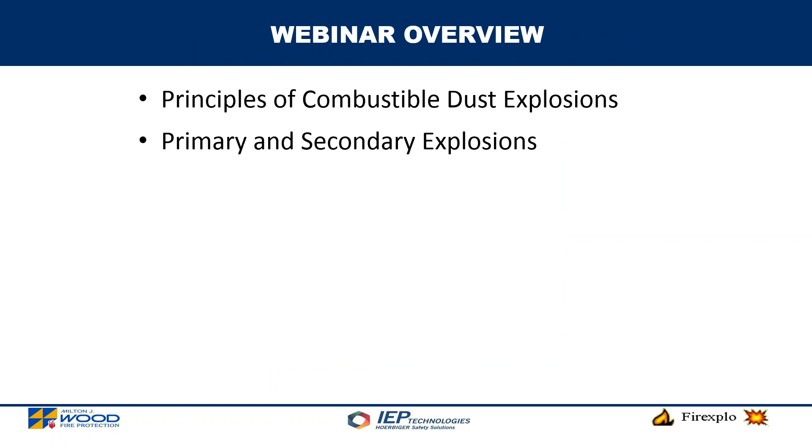So let's talk a little bit about what we're going to learn on today's webinar as we work through the process. The webinar overview is, we'll start with principles of combustible dust explosions. We're also going to talk about primary and secondary explosions. We'll talk then about hazard assessment and ignition risks. We're going to talk about fire protection requirements, fire protection examples and best practices, explosion protection strategies, and finally about process vessels at risk.

The experts are looking forward to covering all of these topics, and we'll start this afternoon's presentation with Dr. Bob Zalosh. Dr. Bob Zalosh is from Firexplo, and he'll be talking, as you can see here on the screen, dust explosion hazard analysis for biomass facilities. A great place to start today's discussion. Again, you can submit questions using that question portal, and we look forward to the presentations today. Dr. Zalosh, the webinar is now yours.

Okay, thank you, Tim, and hello everybody online. The discussion I'm going to provide of dust explosion hazard analysis for biomass facilities is intended to lead to the determination of appropriate explosion prevention and explosion protection measures.

Okay, we're going to begin with the elements of a dust explosion as illustrated in this slide. We start with some combustible powder or dust sitting on a surface inside or outside process equipment. We then subject that combustible powder or dust to a disturbance or airflow so as to lift the dust and form a dust cloud. If the concentration of the dust cloud is greater than the minimum explosible concentration measured for that particular dust, and if the dust cloud encounters an ignition source, the result is flame propagation through the dust cloud, what's formally called a deflagration. If now the deflagration occurs in a confined area, that confinement is all that's needed to produce the dust explosion that we want to prevent or protect.

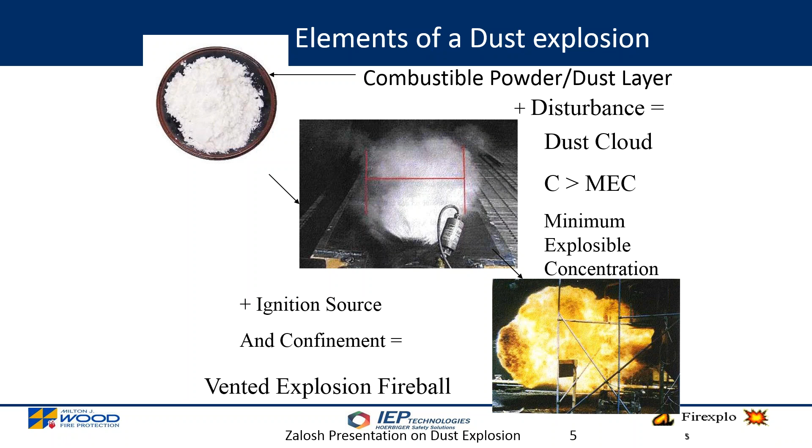Why and when does a burning dust cloud result in an explosion? The answers are: when the dust particles burn rapidly enough and are sufficiently concentrated for the flame to propagate through the suspended dust cloud, and when the cloud is burning in an enclosure that restrains the expansion of the hot gases produced by the burning dust particles. It is this restraint of the normal expansion that generates the pressures that we associate with a dust explosion.

Some examples of biomass facility process equipment where a dust cloud may be present during normal operations are particle size reduction equipment such as a hammer mill, conveying equipment such as a screw or belt conveyor, a pneumatic air transfer duct, and a bucket elevator.

Storage bins and silos have dust clouds during the loading of that equipment. Media dust collectors have dust clouds during the pulsing, and those dust clouds can result in the dust collector explosion you see here. Cyclones, pellet coolers, and rotary dryers.

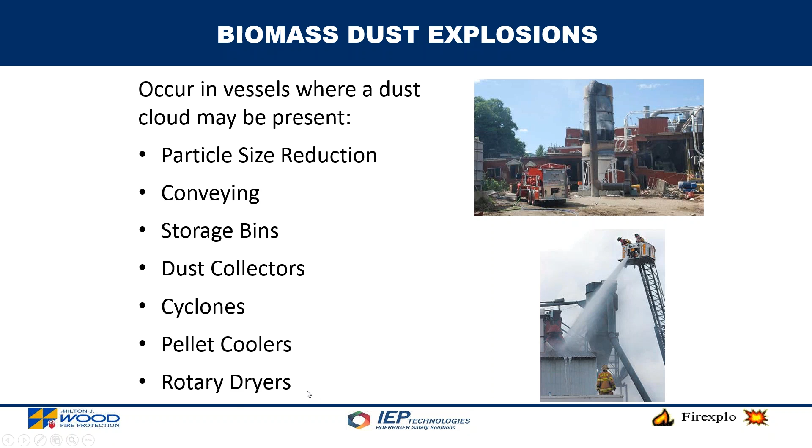I'm now going to start discussing frequent ignition sources in this equipment. In the case of mills and conveyors, a common ignition source is tramp metal brought in with the biomass feedstock in the form of screws, bolts, nails, wire, and other metal inadvertently included with the biomass delivery to the plant. It's possible in many cases to remove that metal by installing a magnet on or over the conveyor or by providing an electromagnetic pulley that will divert the ferrous metal from the normal process flow stream.

We're looking at, in this slide, the result of tramp metal being impacted by swinging and rotating hammers in a mill while the biomass is being milled. The impact and frictional heating of the biomass material produced the ignition and char layer that you see on the hammers. The result in this case was a dust explosion in the mill that caused serious burn injuries to the mill operator.

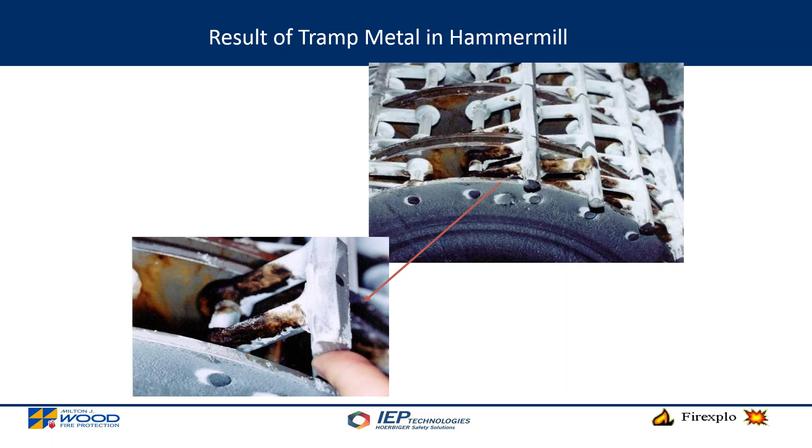The photograph on the left of this slide shows the result of a dust explosion in a bucket elevator and conveyor at the top of some silos at a grain elevator terminal. The explosion propagated to other areas of the plant and equipment in the plant.

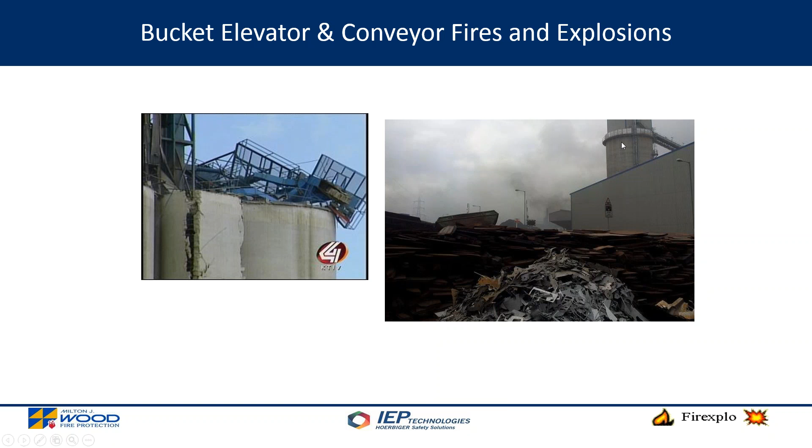In the case of biomass dryers, two common ignition sources are overheated particulate accumulations in the dryer and recycling of fines that have already been dried. So the additional heating can raise the temperature of the fines or the accumulated particles up to the ignition temperature.

The photographs on the left show the fire damage to a large rotary drum dryer due to recycling. Fire was initiated by the recycling of fines.

In the photograph on the right, we're looking at the discharge end of a large rotary drum dryer at a wood pellet plant. The explosion occurred in the dryer. It blew off the other end, the front end of the dryer, and the blast waves from the dryer explosion blew off the walls in a large portion of the plant.

In the case of storage bins and silos, an important ignition source is self-heating of certain biomass material. This self-heating can be initiated by microbiological processes or the condensation of moisture in the silo. Those initial processes raise the temperature of the biomass enough for chemical oxidation to take over, and if allowed to continue for a long enough period of time under warm ambient conditions, can eventually lead to spontaneous ignition and smoldering of the biomass in the silo or bin.

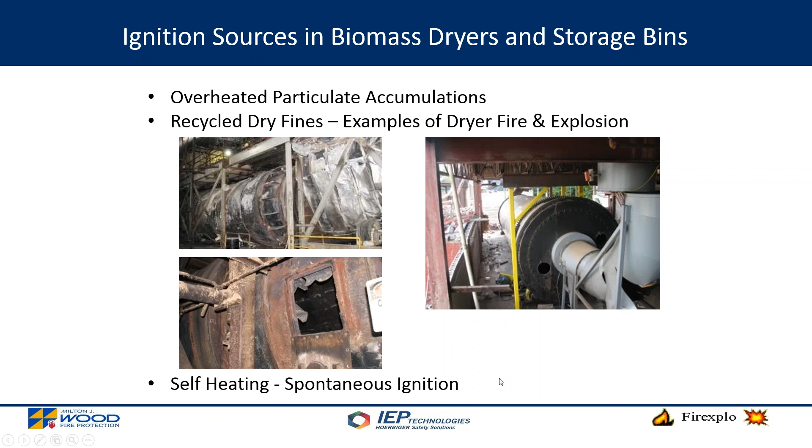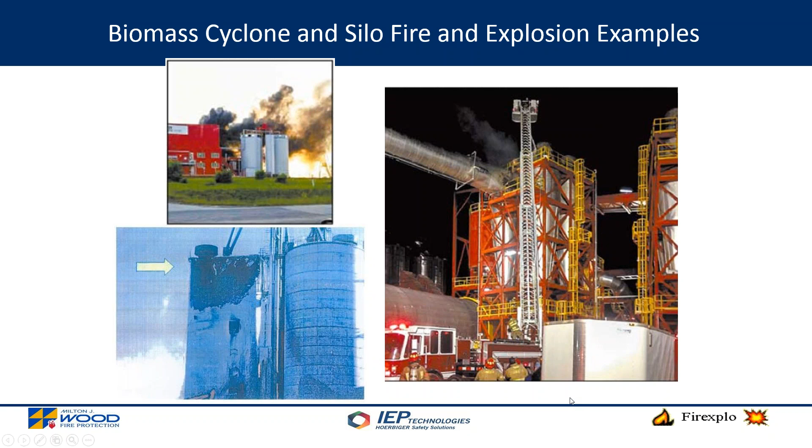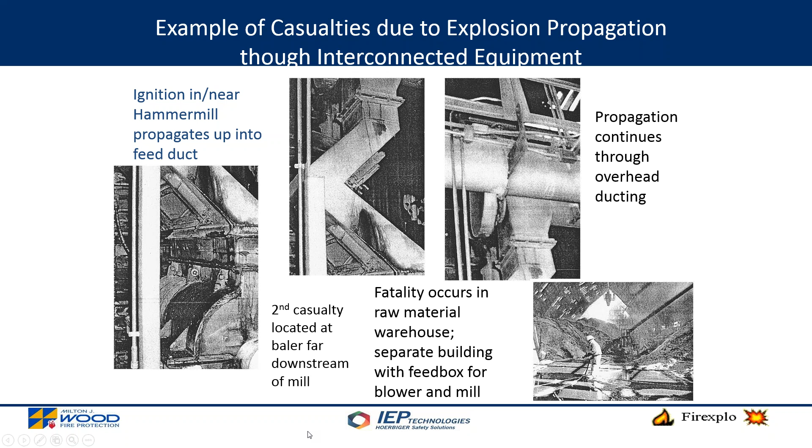In this slide, we're looking at photographs of buildings at a wood pellet plant that experienced an explosion and fire. In the foreground is a large receiving area at the plant. In the back of that building was some classifying and screening equipment and also a dust collector that had explosion vents, but the explosion vent released and vented towards a group of wood silos only a few feet from the wall of the building. The other buildings in the plant housed the dryer, the pelletizers, and the pellet cooler, among other things.

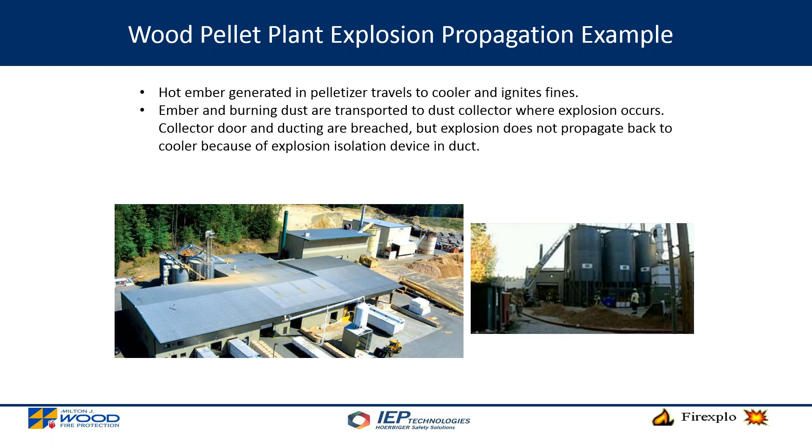The vented flame from the dust collector explosion impinged on the silo outside the collector. The silo fire that resulted required 14 hours of firefighting for extinguishment. Fortunately, there were no injuries in this incident.

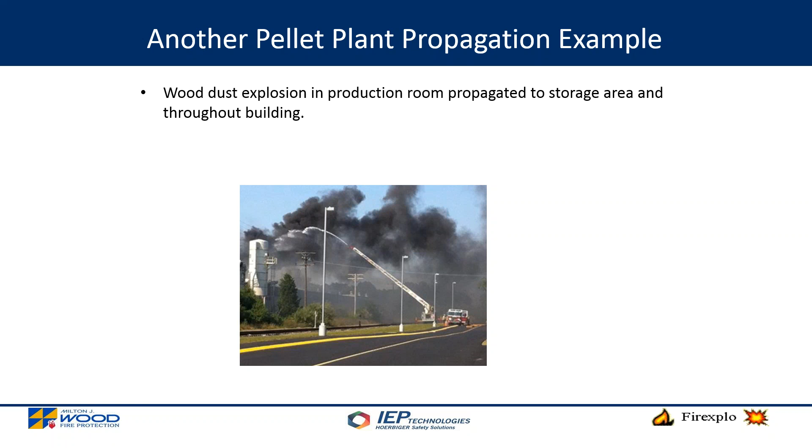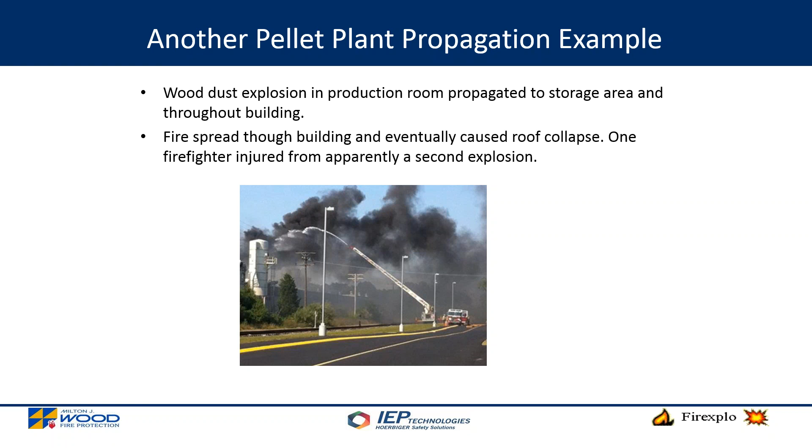When explosions like this occur, OSHA is going to be at the plant shortly thereafter.

In the first incident, OSHA inspected the plant and eventually cited it for serious violations of specific OSHA regulations, and also for violating the Section 5(a)(1) General Duty Clause, which requires a workplace free from recognized hazards. NFPA standards were offered as examples of recognized hazards and examples of abatement measures. In this case, the plant successfully hired an independent consultant to review proposed abatement measures and satisfy the settlement agreement for the incident.

In the second incident, OSHA found that the retention bin at that plant lacked spark detection, explosion suppression, fire and explosion isolation, and explosion venting devices. A conveyor system carrying combustible wood products lacked spark detection and fire suppression devices. OSHA cited the plant for 11 serious violations of workplace safety standards and required corresponding abatement measures. In this case, the plant was eventually shut down.

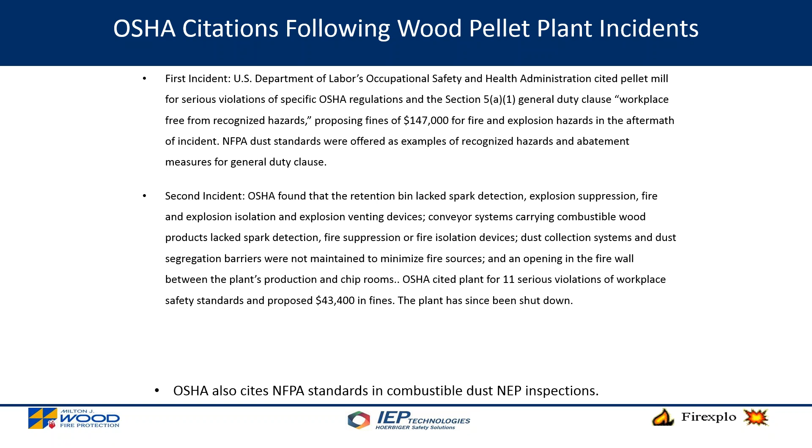Also, OSHA can conduct inspections without any incident if a plant employee communicates to OSHA that he or she is concerned about unabated fire and explosion hazards due to combustible dust at the plant. And each OSHA area office is also obligated under the Combustible Dust National Emphasis Program to conduct a few random inspections, even though there is no employee complaint or incident.

In the case of agricultural biomass, it would be the NFPA 61 standard on prevention of fires and dust explosions at agricultural processing facilities. These standards also refer to other NFPA standards, such as NFPA 654, which has valuable information on spark and ember detection and extinguishing systems and explosion isolation systems, as well as explosion protection for individual process equipment. Those standards also refer to NFPA 69, which provides the detailed requirements for explosion suppression systems and for explosion isolation systems.

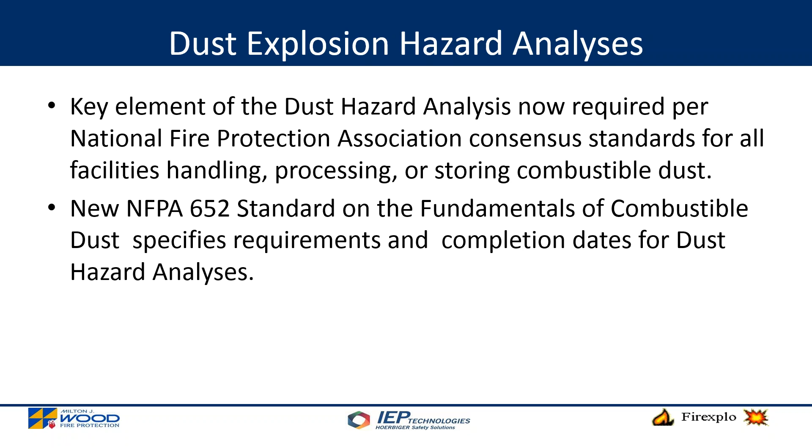The NFPA standards require a dust hazard analysis for all facilities handling, processing, or storing combustible dust. The NFPA 652 standard in particular has specific requirements and scheduled completion dates for the dust hazard analysis. The 652 standard requires that the dust hazard analysis evaluate the fire, deflagration, and explosion hazards and provide recommendations for managing those hazards. Where such a hazard exists, the identification and evaluation is required for specific fire and deflagration scenarios.

In other words, there's a need to identify where and how the dust clouds are formed or the dust layer is ignited, what the ignition sources would be, and what the results of an unmitigated fire or explosion would be. The dust hazard analysis shall also address potential deflagration propagation between parts of the process system and potential deflagration propagation between buildings or building compartments.

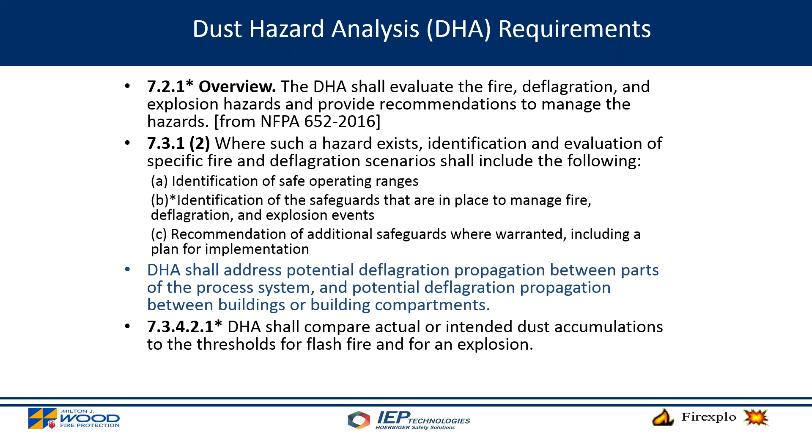The DHA shall compare actual or intended dust accumulations to the thresholds for flash fire and for explosions, which are described in the individual standards for wood processing, agricultural facilities, and other combustible dust commodities, and other similar standards.

There's a dust hazard analysis schedule required by 652 for new facilities and for significant modifications of existing facilities. The analysis has to be completed as part of the new facility development project. For existing facilities not undergoing significant modification, the dust hazard analysis has to be completed by September 15th, 2018, 3 years from the effective date of the standard, September 15th, 2015. So plant owners and operators have about 5.5 months to initiate the first dust hazard analysis and about 2.5 years to complete the dust hazard analysis for all the combustible dust areas in existing plants.

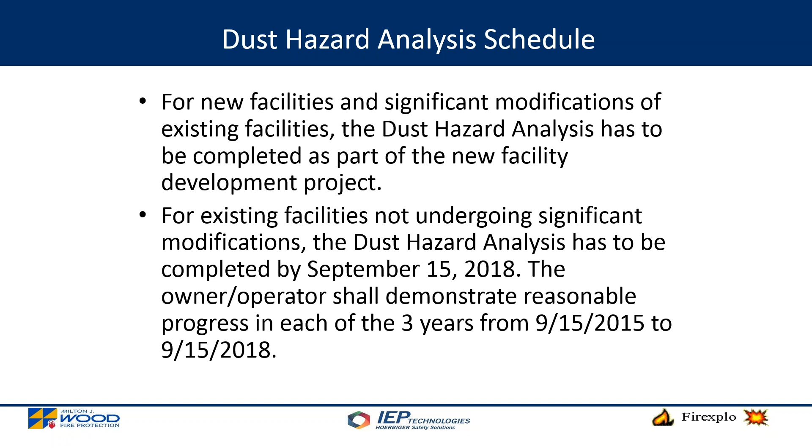That completes my portion of the presentation, so I'm going to throw it back to Tim.

Dr. Zalosh, thank you very much. Great foundation for the remainder of the webinar.

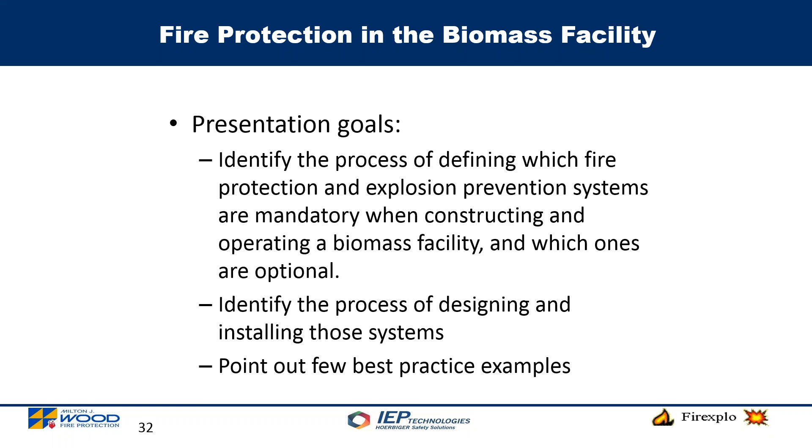Thanks, Tim, and good afternoon, all. I really appreciate the opportunity to present this brief outline of the process behind designing, constructing, and operating the key fire protection and explosion prevention features in a biomass facility. The presentation goals this afternoon are to identify the process of defining which fire protection and explosion prevention systems are mandatory and which are optional when constructing a facility, to identify the process of designing and installing those systems, and to give a few best practice examples.

So, how do we design and operate a biomass facility? First, the starting point are the building and fire codes. They tell us what we must do. They're basically the law of the land, so they're clearly mandatory, and they're almost exclusively occupancy-based, based on the buildings or occupancies that house the equipment.

The next building block are the adopted standards. They tell us how to do it. Those standards that are referenced in the building and fire codes are mandatory. Some, like insurance standards that might go above and beyond the mandatory standards, could be optional, depending on the relationship you have with your insurer. A few of the standards remain occupancy-based, but there's a clear shift into targeting a specific process or system with these adopted standards.

And so we arrive at the next key building block, which is our process hazard analysis. This is strictly a process and equipment-driven evaluation that has a mandatory implementation aspect and an optional implementation aspect. An example of the mandatory aspect is the PHA itself - it is mandatory for all facilities that handle hazardous materials like combustible dust. Furthermore, if we have an explosion hazard identified within the PHA, the protection option must be implemented. It's not optional.

And the last one is our government regulations - that would be OSHA, EPA, and similar, which lean more on the operational side rather than the upfront design and construction side of things. In the interest of time, the PHA and the government regulations are not going to be the subject of this presentation, so I'm going to make them disappear from the slides.

And on we go with our building and fire codes. So what are they? As mentioned before, they're adopted and written into the laws on a state-by-state level. The most widely used in the U.S. are the International Building Code, International Fire Code, and NFPA. There are some other fire and building codes implemented in other states, but these are the most dominantly used. They tell us what to do for any type of occupancy, and then specific to the occupancy type. They also tell us where to look for how to do whatever they ask us to do, through their reference to design and installation standards.

So what's defined in the building and fire codes? Many things on the construction side, on a fire protection and explosion prevention specific side. We have fire service features, emergency planning and preparedness, fire resistance rated construction, fire and smoke protection features, fire protection systems, control of ignition sources, means of egress, housekeeping and maintenance, and some others.

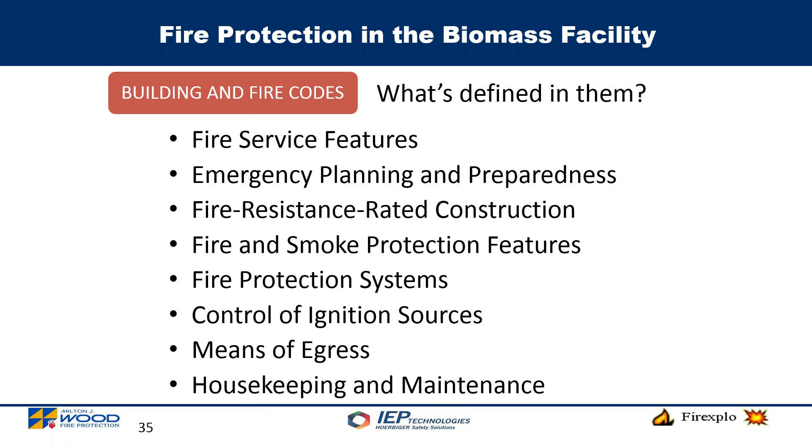An example that's very often overlooked in the initial design stages of the facility are the fire service features. All facilities, irrespective of their function, must be provided with full access into and around the facility by the responding fire brigade, and with an adequate water supply to fight fires expected in the facility.

As far as full access is concerned, typically a 20-foot wide road within 150 feet of any exterior wall in the facility. Water supply, volume, and duration are based on the larger of two things: one is the total surface area or square footage and construction type of your largest building in a facility, and two is the most demanding automatic fire protection system demand. Whichever one of these is larger, that's what you need to size your water supply to.

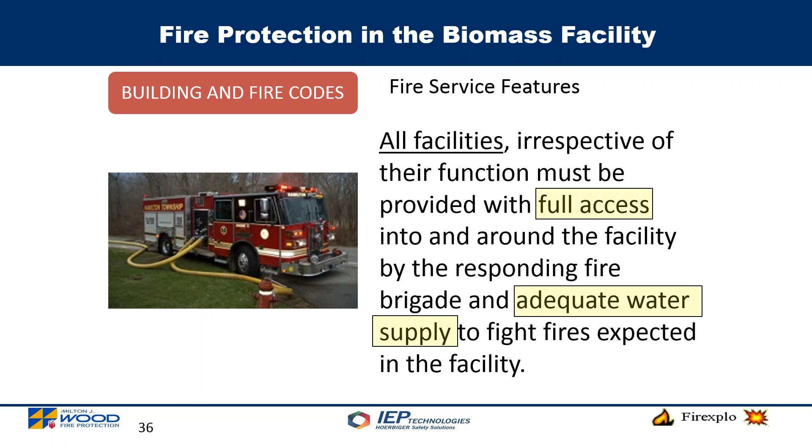Apart from those general requirements, the code defines the occupancy-specific features based on use and occupancy classifications. Typically the operating structures in a biomass facility will fall into one of the following classifications.

We have an F1, factory occupancy. We have an S1, or storage occupancy. We have an H2, a high hazard occupancy containing materials that pose a deflagration hazard, as is the case with our combustible dust. And we have an H3, high hazard occupancy, that contains materials that readily support combustion. That example is combustible fibers.

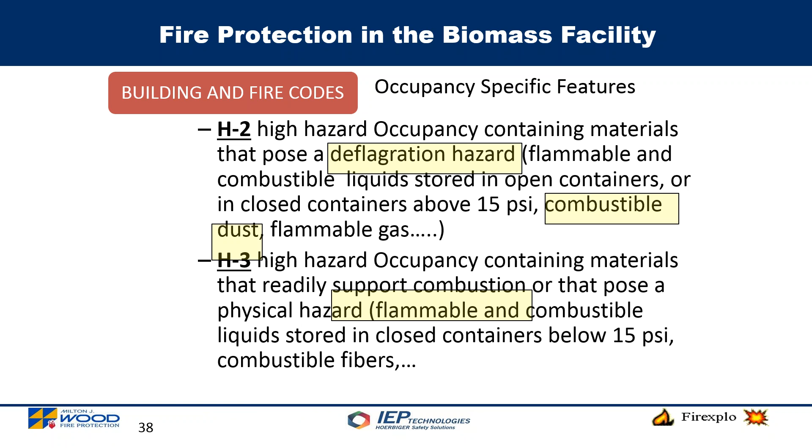Our slide here is messed up a little, excuse me for that. So the question asked is, does any flammable or combustible liquid, combustible dust, or combustible fiber inside an occupancy automatically qualify it as H2 or H3 occupancy? And the answer is clearly no.

Only when we exceed the minimums allowed by the building code in case of the flammable and combustible liquids and combustible fibers, and that's table 307. I'm just going to give you a snapshot of that table, if the presentation cooperates with me.

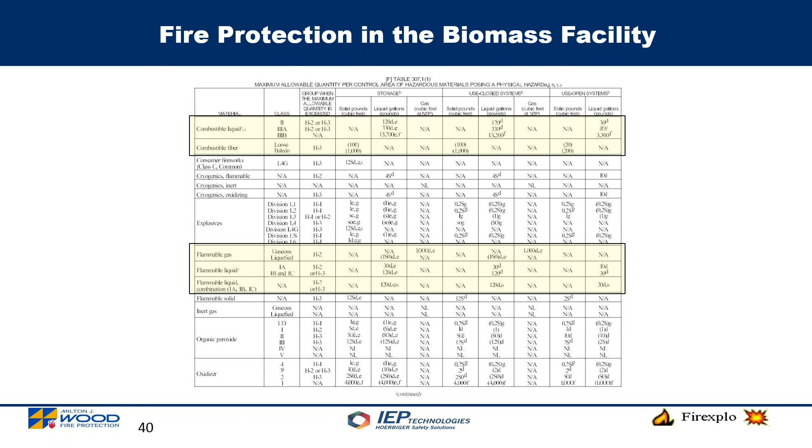This table basically gives you the maximum allowable quantities in a control area in your facility, either stored, used in a closed process system, or used in an open process system. If you exceed these quantities, you will no longer be able to qualify the facility or the occupancy as F1 or S1. You'll have to go to H3 in this case, or H2.

In case of the dust, combustible dust, if you exceed the quantities that are the minimums prescribed by NFPA standards - 654, 664, 652 that Dr. Zalosh just mentioned - then you would fall into an H2 occupancy category.

So, crucially important for the occupancies that are originally designed, permitted, and constructed as F1 and S1, as most of our biomass facilities are, they must be operated in a way that will not move them into H2 or H3 occupancy. And how do we do that? Very simply, it's housekeeping - we need to keep the hazardous materials below the minimums allowed.

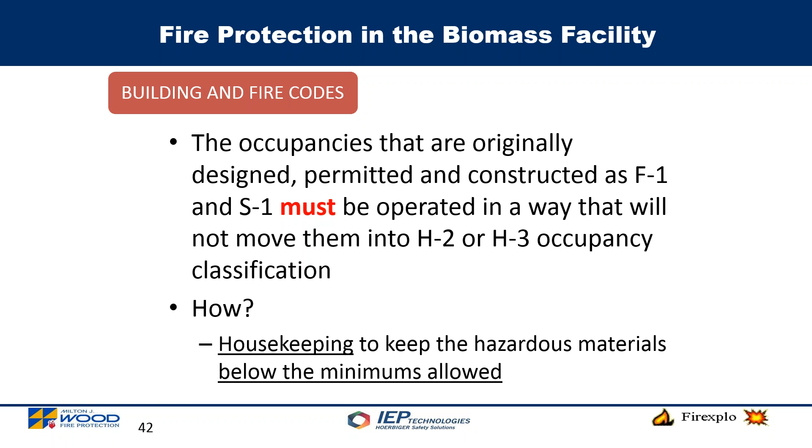Material control and housekeeping. So what all is determined based on the occupancy classification? Type of construction, construction methods and materials, maximum area and height of our buildings based on them being or not being protected with fire protection systems, structural requirements, EMP - electrical, mechanical, plumbing requirements - fire and smoke management, means of egress, and fire protection requirements. So fire protection requirements specific to this presentation are contained in Chapter 9 of the Building and Fire Codes.

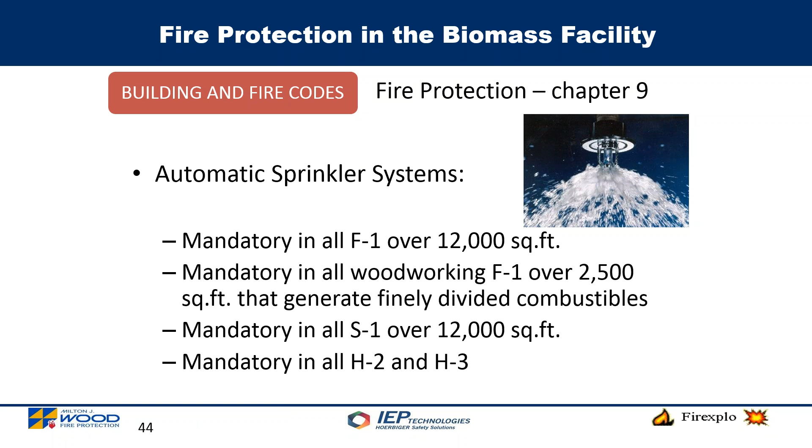Automatic sprinkler systems are one of the top ones in line for that. They are mandatory in all F1 occupancies over 12,000 square feet. Furthermore, they're mandatory in all woodworking F1 occupancies that generate finely divided combustibles over 2,500 square feet. They are mandatory in all storage S1 occupancies over 12,000 square feet. And they are mandatory in all H2 and H3 occupancies, irrespective of the square footage of the building.

The code allows for use of alternative automatic fire extinguishing systems. I know we have probably a lot of people here from the pellet industry and other biomass industries that are not particularly fond of water. There is an option in the codes for those buildings that they do not wish to protect with water to protect them with an alternative system.

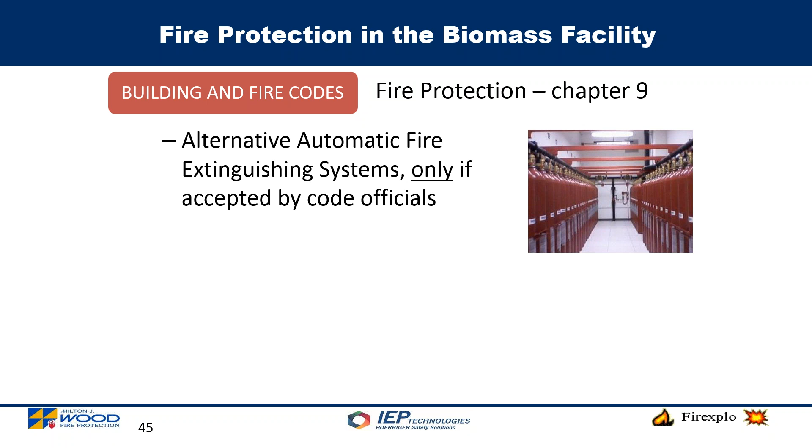The picture on the right hand of the presentation shows the gaseous suppression system. There are some other options with dry chemical systems and some other systems, but they are allowed by the building code only if accepted by the code officials as an alternate to the sprinkler systems mandated in Section 903. Fire Protection Chapter 9 further describes the requirements for fire detection alarm systems, typically based on the number of occupants in the building.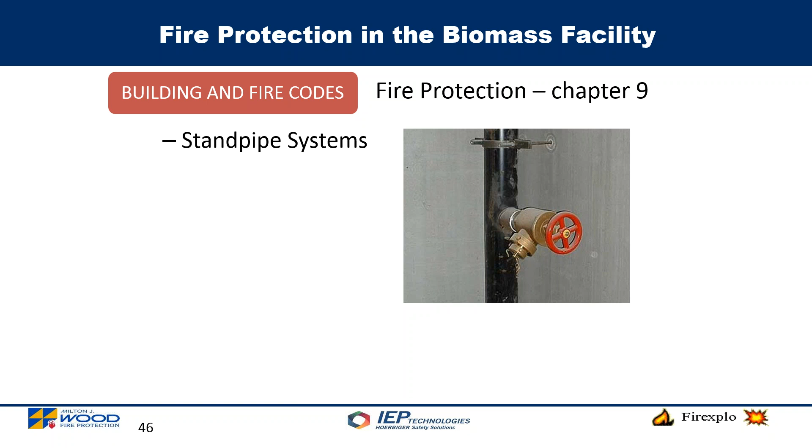Our standpipe systems are typically based on the height of the highest operating floor above the road, or the depth of the basement operating floor above or below the operating roadways used for fire department access. Typically anything over 30 feet in height requires a standpipe. Then we have fire extinguishers, pretty much common these days and located throughout the facilities.

We have our smoke control systems, smoke and heat vents. Again, very often disregarded in the initial design stages. Clearly required by the building code for any F1 and S1 occupancy that has more than 50,000 square feet in undivided area.

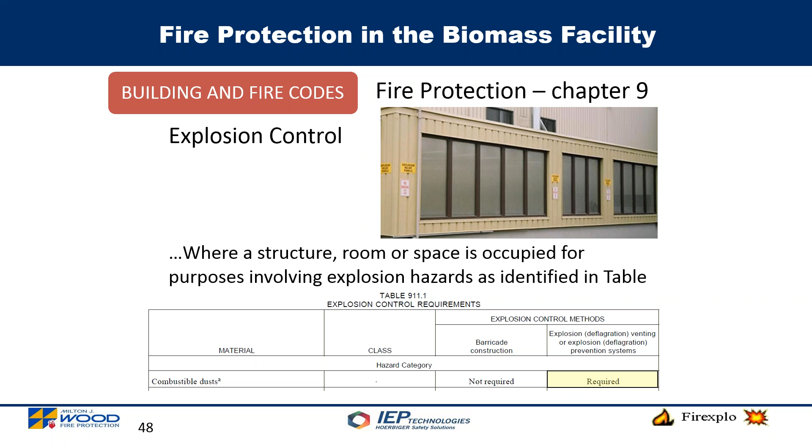Lastly for this slide, we have explosion control. Where we have a structure, room, or space occupied for purposes involving explosion hazards as identified in this table, you can look at the excerpts from the table in the bottom left corner. Combustible dust is one of them, and our explosion venting or explosion prevention systems are required. Again, this is occupancy-based building code. We are talking about explosion venting or explosion prevention systems for the rooms or spaces within the structure, not specifically equipment.

Building and fire codes further expand into the specific types of facilities. A couple of examples I'll give you here are from Fire Code Chapter 13, combustible dust producing operations. You can find the requirements for those in Chapter 13, and we also have Chapter 19 for lumber yards and woodworking facilities that clearly apply again for our biomass manufacturing facilities.

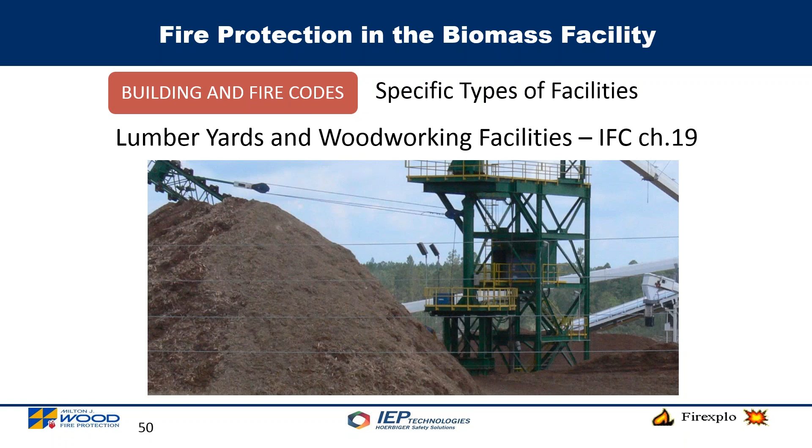As far as the adopted standards are concerned, they are one of three kinds. Those specifically called for in the building and fire codes would be referenced NFPA standards typically in the U.S. Those that are specifically adopted by the states across the board, an example of that would be the state of Florida. There's a list of NFPA standards that are adopted across the board and mandatory to be used, irrespective of the fact that they might not be specifically called for in a building code or a fire code.

Then we have the insurance underwriter standards, again often overlooked initially in the design stages of the facility, very costly to implement later. FM Global data sheets are most commonly used for HPR, or highly protected, facilities.

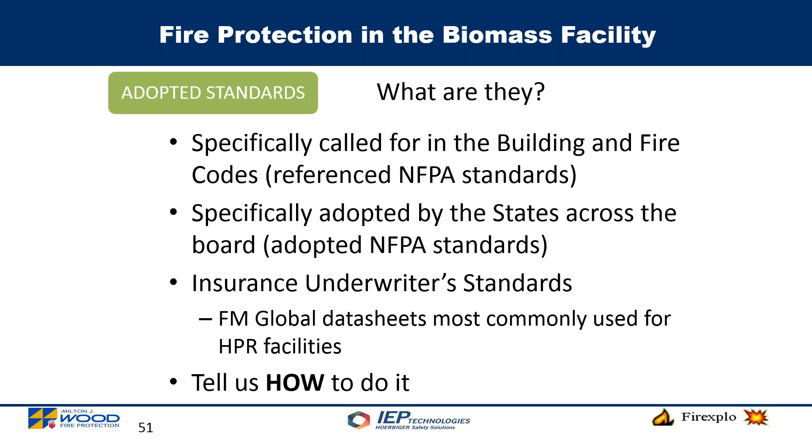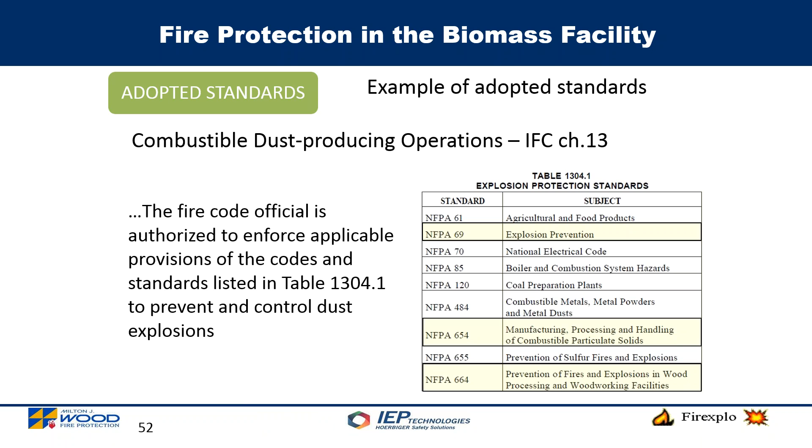Adopted standards tell us how to design, construct, and commission the systems required by building and fire codes. Examples of adopted standards would be in Chapter 13, which I mentioned before, for combustible dust producing operations. If you are one of those, Table 1304.1 will specifically call for you to comply with NFPA 69, explosion prevention; NFPA 654, manufacturing, processing, and handling of combustible particulate solids; and NFPA 664, prevention of fires and explosions in wood processing and woodworking facilities.

What's defined in adopted standards? They give us the details on how to design, install, commission, and maintain the systems required by the building and fire codes. The emphasis is on life safety, either through active systems or passive building and process features. Our insurance company standards, in addition to life safety, emphasize the protection of property and business interruption concerns. So by this definition, they would by nature be more strict and more demanding.

I'll give you a few examples of best practices from some of the biomass facilities. We have our dust collectors or air filters. The example on the right-hand side is for dust collectors located outside, and the one on the left is one located inside. Typically, you're going to see explosion vents on the outside air filter or dust collector.

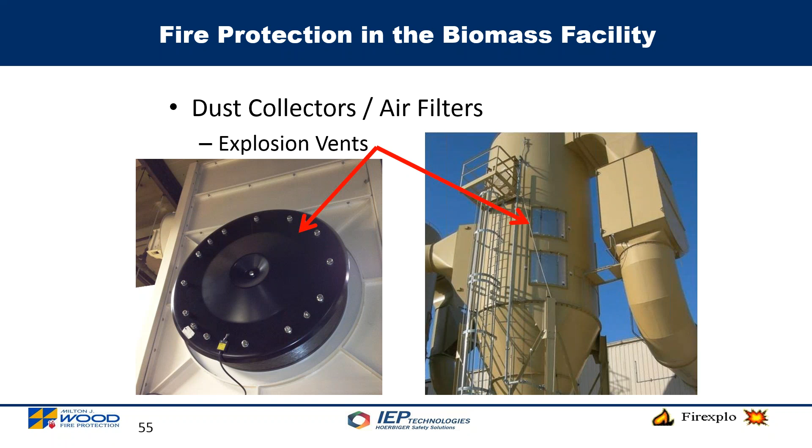This is actually an example of a badly placed explosion vent, because the explosion isolation device you see on the return duct is located directly in the path of the blast zone. A better example is on the left-hand side, our flameless vent example on the dust collectors located inside of the facility.

If explosion vents are not on your menu, either you have no ability to put them in, or you're prohibited from putting them in because of the nature of the product you're handling inside your dust collector, explosion suppression is definitely a viable option, widely used for those purposes.

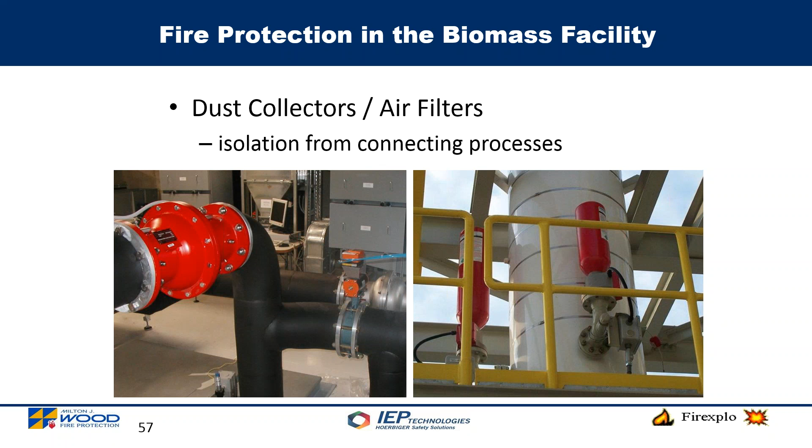We also have isolation from connecting processes. Dr. Zalosh's presentation showed some examples of what happens if you don't have these systems in place. The picture on the left-hand side shows the explosion isolation device or back pressure valve. On the right-hand side, we have chemical isolation, which is injecting suppressant, in this case, in the duct.

We also have spark detection and extinguishing systems. Those are typically put on the ducting that leads into the air material separators or dust collector. On the left-hand side, there's a spark or ember detector looking for the qualifying particle, the ignition source, before it gets into an enclosure that's obviously full with fuel. It then extinguishes it further downstream before we enter into the enclosure.

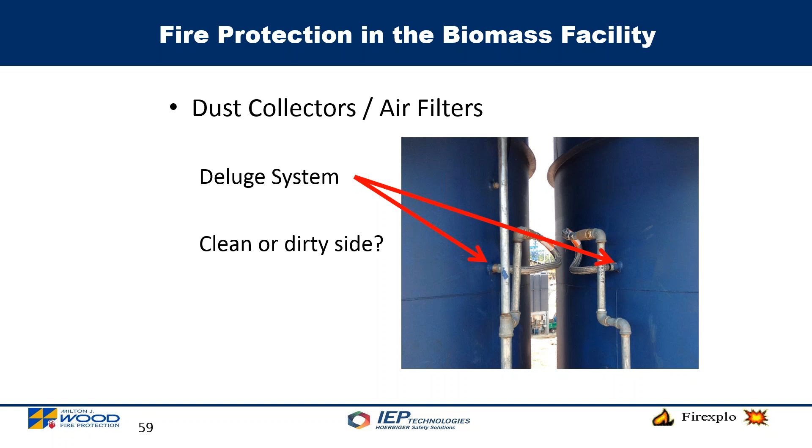We also have deluge systems. These are water-based systems, and you can see an example of a deluge system that has nozzles on the dirty side of the dust collectors. I see many times dust collectors that have nozzles on top in the clean space, which is pretty much useless there because there's no way for the water to effectively make it down to the fuel, which is located on the dirty side.

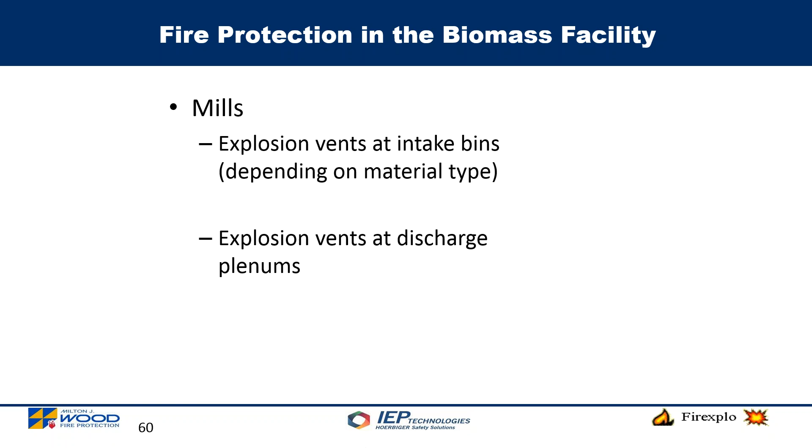Mills, we have plenty of those around. We want to see explosion vents, or we might be mandated to put explosion vents on our intake bins, depending on the material type. If we have coarse material like wood chips, we might not have to do that. If we have fine material like sawdust or fines, we more likely will have to do it. We put explosion vents on discharge plenums from the mills.

We also want to put the deluge systems in a discharge plenum. So clearly the plenums are full of fire load material, and if there is an ignition of that material inside of the plenum, this is the way to extinguish the fire.

Further on mills, mechanical or chemical isolation from connecting processes, typically rotary valves upstream of the mill, screw conveyors downstream or on the outtake of our material from the plenum. Then we have either the explosion isolation device or a chemical isolation on an air duct leading into our air materials separator. We also like to see spark detection and extinguishing at our mill discharge.

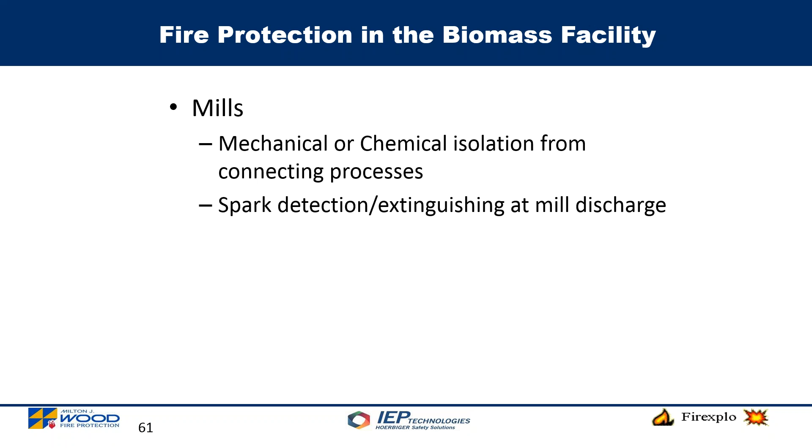Silos, plenty of those around. Again, explosion vents, depending on the material type, are a must. Mechanical or chemical isolation from connecting processes, rotary valves or screw conveyors up on top as well as on the outtake. Chemical isolation on a ducted aeration system that might be leading to a different kind of process or something along those lines. We also have an option to put spark detection and extinguishing at a silo intake to screen the sensitive or potentially hazardous material that comes into the silo.

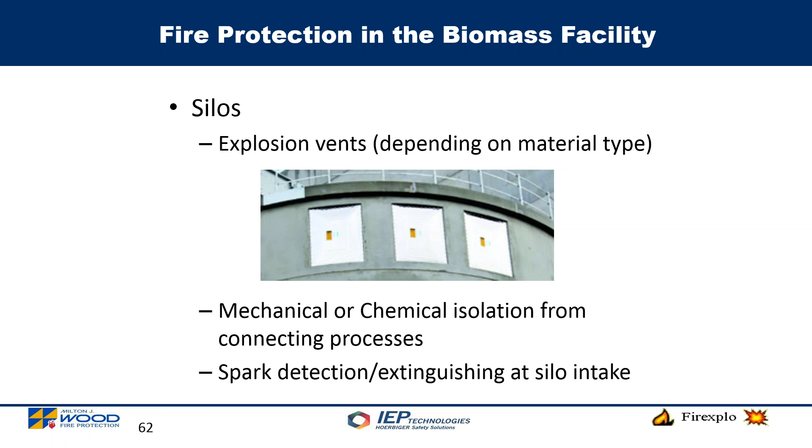We also like to see the deluge system in the silo chute. Those systems would be used if we have to evacuate the product that has a hotspot inside of it. If the choice of the owner or operator is to evacuate the product and then extinguish the hotspot as it exits the silo, if it can be detected effectively, exit the silo before it gets exposed to the oxygen in the air and results in a flashover, the deluge system is the system of choice there.

We also have a gaseous inerting system that we can put in a silo. A couple of flavors there. We can admit the liquid suppressant into the top of the silo. As it hits the air inside of the silo, it's going to vaporize and apply the suppressant into the top portion of the silo. We can also inject the vaporized suppressant either through some type of aeration system that might be present in the silo, or through the sides of the silo into the product mass, letting it percolate through the mass, which takes a lot of time, and then let it reach the concentration that is adequate for effective fire suppression.

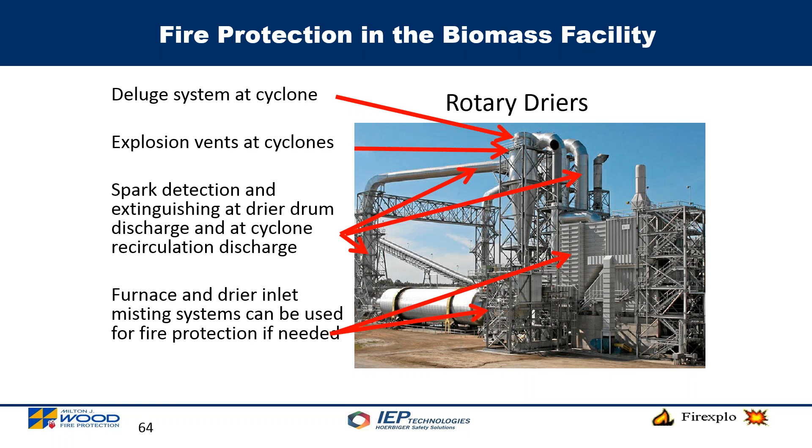And lastly, we have some few examples from the rotary dryers. We have a deluge system at a cyclone top, explosion vents at cyclones, not unlike our silos or dust collectors, spark detection and extinguishing at a dryer drum discharge, and sometimes at a cyclone recirc duct discharge, sometimes also on the material outtake from the cyclone as it leaves the drying system. And then we have the furnace and dryer inlet misting systems that are typically used for process control that can be used for fire protection if needed.

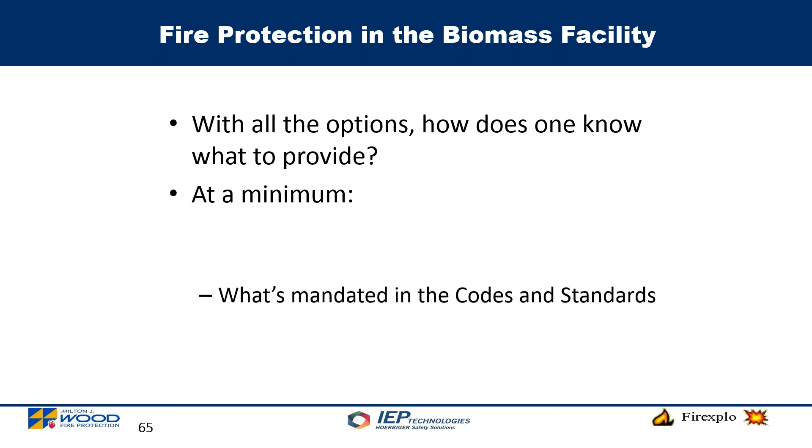So with all these options, how does one know what to provide? Basically, there are three things. One is what's mandated in the codes and standards, what's identified as required in the process hazard analysis, and what's required by one's insurer. That's all you have to do.

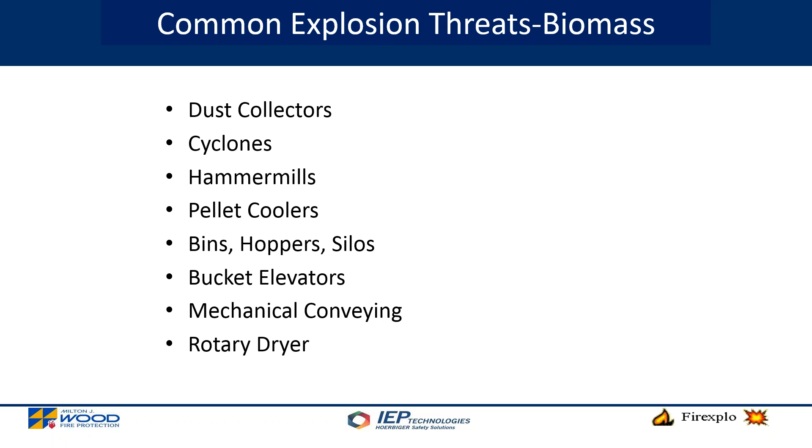So as we discussed earlier, Bob did a great job and Žarko followed up. Here are the most prevalent pieces of process equipment in the biomass industry that we come across that have that high combustible dust fuel mixture, and also has the potential of the ignition source that can lead to the explosion. And the explosion can be protected by these main protection techniques: containment, inerting, venting, suppression, and isolation.

Containment, real quick, is simply designing the vessel real strong so that when the combustion event occurs, the rupture from the deflagration event does not occur. So it's designed real strong to withstand the pressures. Inerting is very simply you displace the oxygen with a non-combustible, non-oxidizing material such as nitrogen or CO2 so that the combustion triangle can never occur. These two types of techniques, although they're code recognized and absolutely fine protection techniques, they tend to be too expensive in the types of applications that are associated with the biomass industry. So typically, suppression and isolation are the most common techniques that are utilized in the industry.

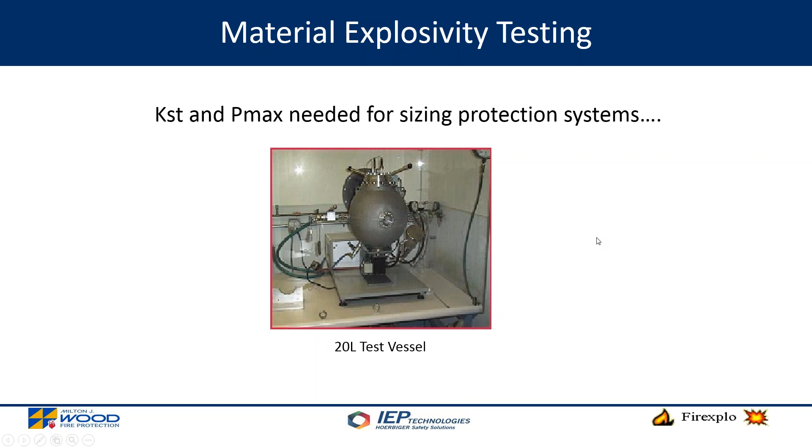And the way KST and Pmax are determined is basically you take a sample of a sieve material, put it inside the vessel, and you ignite it. And you record pressure over time. And the KST is simply the maximum rate of rise, the dPdt of the combustible dust itself, times the cube root of the vessel that it's tested in. So as you can see, the 20-liter sphere, the volume of the vessel that it's tested in is critical.

15, 20, 25 years ago, there were a lot of tests that were based upon a 1-liter Hartmann tube, and they would produce lower results than what a 20-liter sphere would produce. So if you do have an old test report, please review it, confirm that the material has been tested, and it's to the current standards, ASTM E1226.

A lot of misnomers out there about KST that I come across. People let me know that the material isn't that explosive because the KST isn't that high, it's only 50 or 60. Really, that just tells you that you have a little bit longer time to deal with the explosion and put it out. However, it's still going to be under a second.

What you really also need to keep your eye on is Pmax, the maximum amount of pressure that a combustible dust explosion will produce. Typical values of Pmax are from 6 to 10 bar, which is about 90 to 150 psi. So even though your KST may be relatively low, you still have a very combustible and rapidly producing pressure explosion hazard that can happen inside your process.

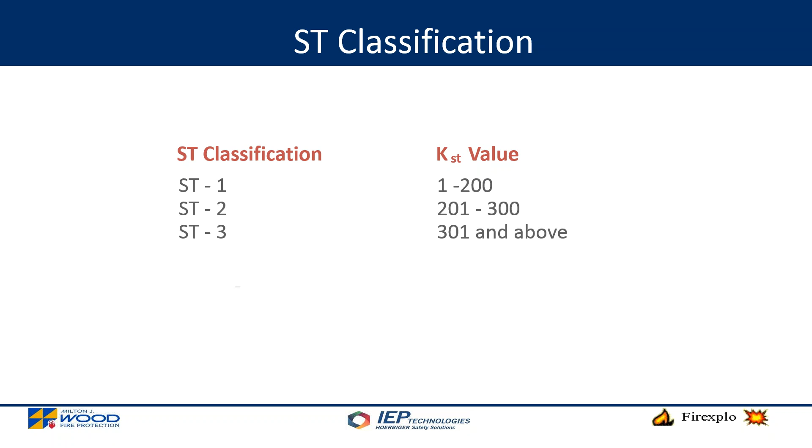Now, the first main protection technique utilized in explosion protection is venting. That's simply a weak membrane on the sidewall of the vessel that opens up at a predetermined set point. Based upon the strength of the vessel, the size of the vessel, and the combustibility of the material, NFPA 68 determines what size and amount of vent area is required to provide proper protection.

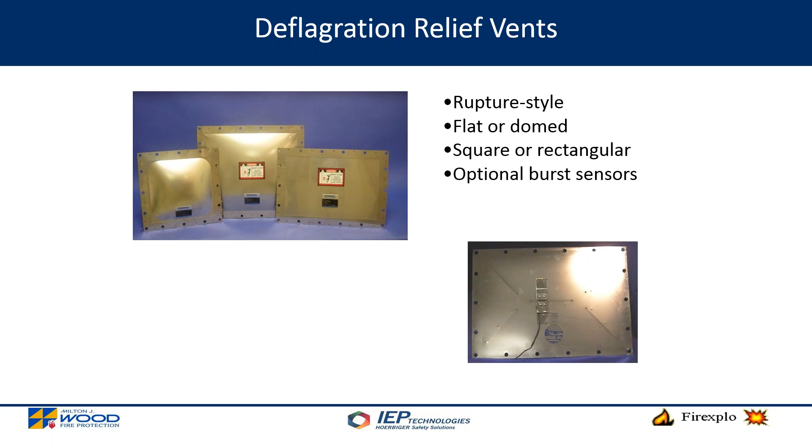Explosion vent panels can come in various sizes and shapes. They can be rectangular, round, flat, or domed, all based upon the application. The flat rectangular vents are more cost-effective and easier to manufacture. However, they have limited vacuum resistance and limited cycling applications. Depending upon the process pressure conditions, that will drive what type of vent panel makes the most sense for a given application.

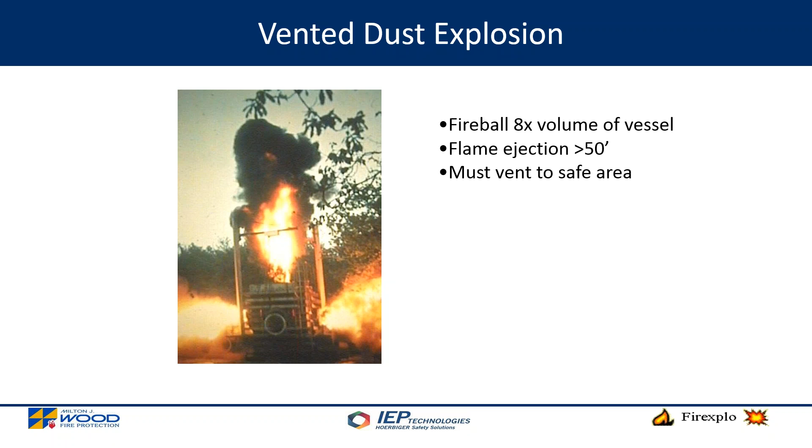Here's a quick video clip of a vented explosion between 2 vessels. This was done over in Germany. All right, let's see if I can try it again.

Okay, as you can see, you get a pretty significant flame ejection. This is put in place here to illustrate that the definition of a safe area really needs to be considered to make sure that venting is the proper solution for a given application.

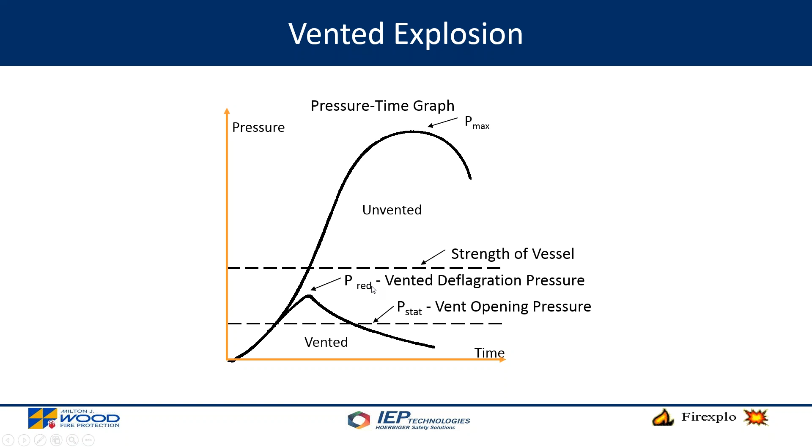Here's that pressure time curve we saw earlier, except now you can see the effects of putting an explosion vent panel on the vessel itself. Here is the curve of the unvented combustible dust explosion, and you can see here's where the opening of the vent panel occurs, and here's the resultant or reduced pressure that the vessel needs to withstand. As you can see, the P-red is below the strength of the vessel, so it provides proper protection.

With NFPA 68, you need to know what the strength of the vessel is. That's a key ingredient in sizing these systems. But you need to keep in mind that venting will not do anything to stop the flame propagation, so there may be subsequent fires or whatnot with the material after the event, and you can't vent inside the building. You can use vent ducts to take the vent and the fireball to outside the building.

However, there's going to be a penalty in the NFPA calculation when you do that. The slug of air that is in between the vessel vent membrane and the sidewall that goes outside the building needs to be pushed out of the way by the fireball. That's going to create a back pressure, resulting in the need for more vent area.

There is the possibility of using flameless vents. Flameless vents work by having the flame pass through a mesh membrane, extracting the heat and keeping the flame from propagating outside the vessel. Keep in mind that you're not going to get the full vent area when you use a flameless vent; you're going to have an effective vent area which is a lot smaller than the actual opening itself. You also need to make sure there's a safe zone around the flameless vent, because hot gases are still going to propagate outside of the flameless vent itself.

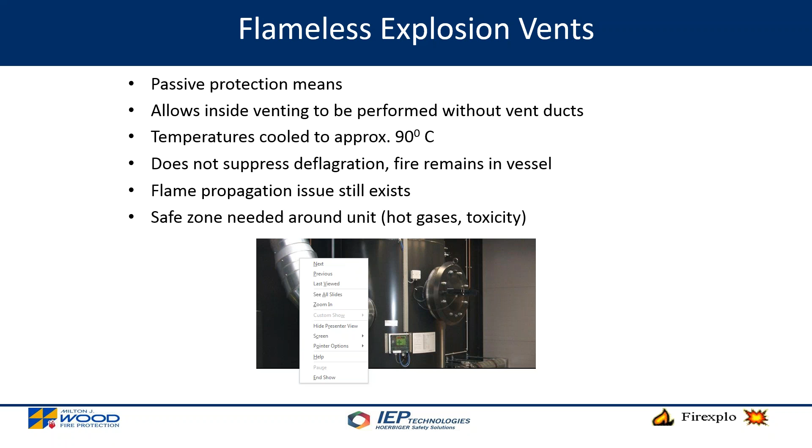Here is our spring-loaded type explosion vent panel. There's a plate on the sidewall of the vessel held back by a spring. When the pressure wave and fireball hit the membrane, it pushes up on the spring, allowing the flame to propagate through the mesh membrane.

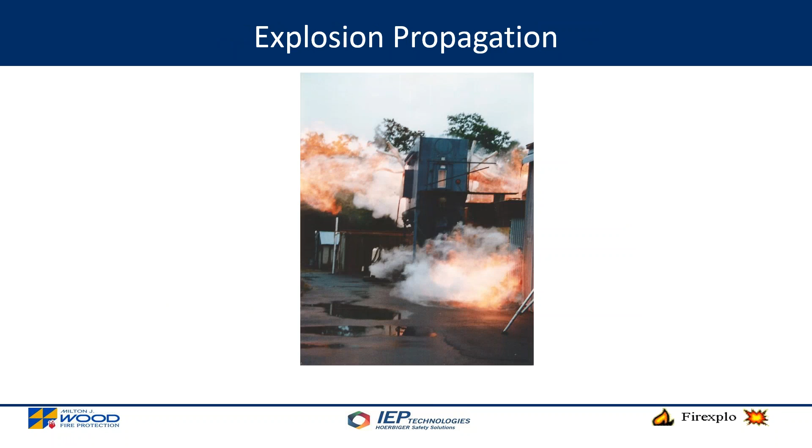As Bob illustrated earlier in the presentation, there's a need for proper isolation between connected vessels. As the fireball starts to propagate, it can very easily propagate upstream and downstream from the explosion hazard as long as there's fuel and air inside the interconnected ducting. So NFPA recognizes the need for isolation between devices.

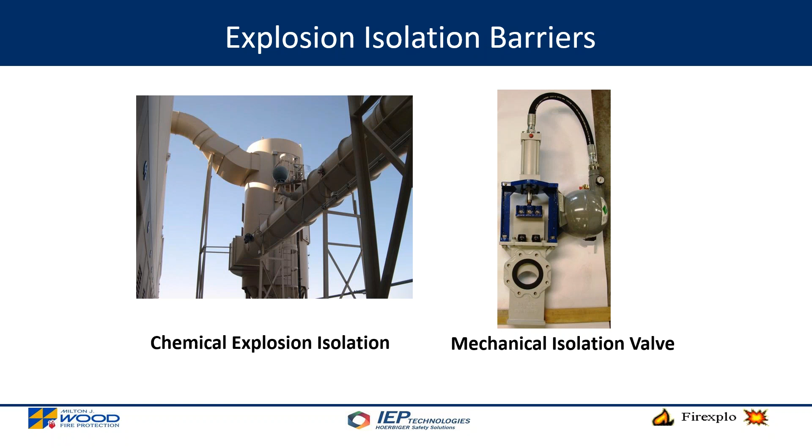The isolation types can be active. It could be a chemical isolation where it discharges copious amounts of agent into the ducting to provide an inert barrier and extinguishing zone to stop the flame front. Or it can be an active mechanical device such as the knife gate shown in the picture on the right, where the nitrogen bottle drives the piston down and provides a mechanical barrier from the flame front.

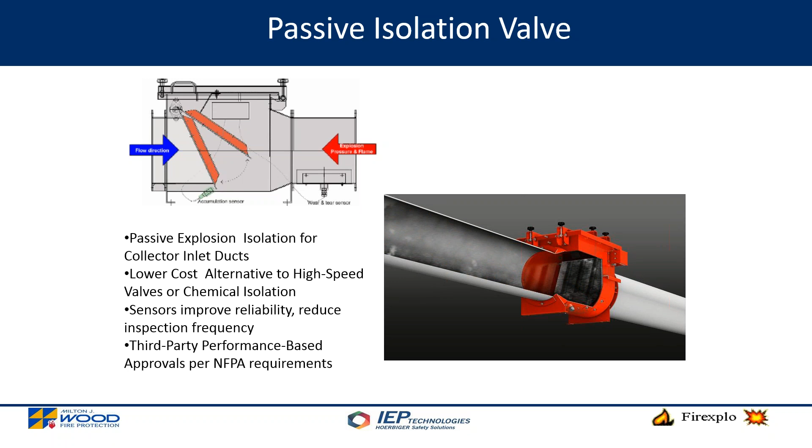The last main type of protection system is an active suppression system. This consists of a pressure detector that detects the explosion during the early stages, a control panel that monitors and activates the extinguishers, and they discharge agent directly into the process to extinguish and suppress the event before the pressures reach destructive levels.

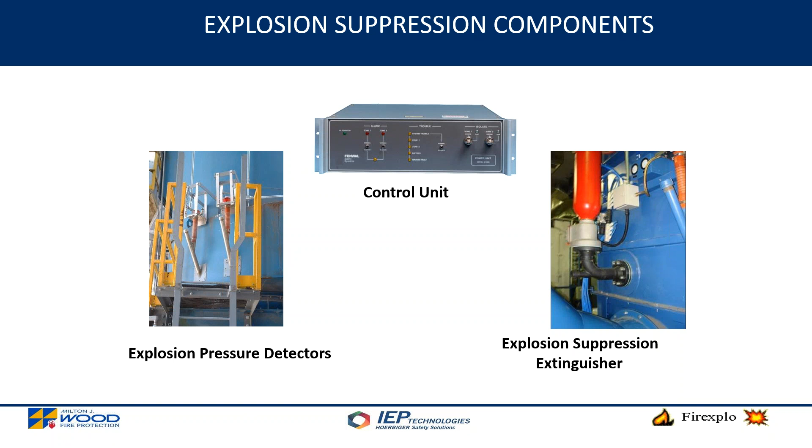Three main components, as I mentioned: the actual pressure detectors that sense the explosion, the control panel that monitors and activates the bottles, and also provides the process shutdown to interlock and make sure that the flame doesn't propagate to any parts of the process after the suppression occurs.

Pressure detection is probably the most important part of the suppression system. You need reliable detection of the event, and you need to detect the pressure event reliably before it gets too far. The main type of detector we use is an electronic MEX detector. It has two capacitive discharge strain gauges that continually sample off the process. It plots a curve and waits for a curve associated with an explosion to activate the system.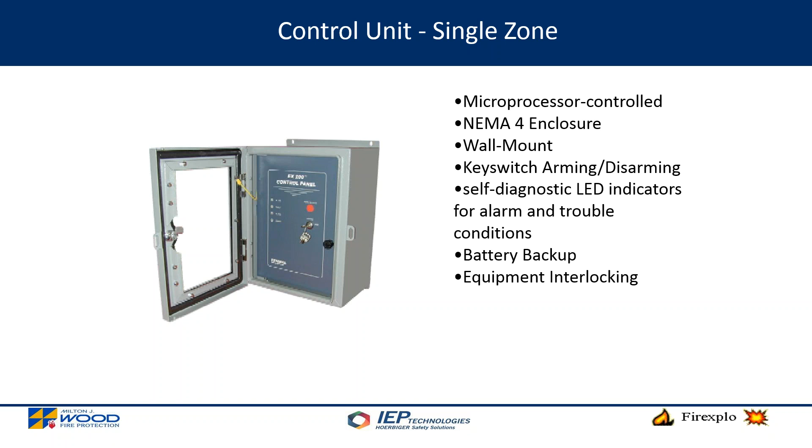The control panel is essentially a black box. 120 volts gets wired into the control panel. We wire out to the detectors, and we have wires out to the bottles. When the signal from the detector is sensed by the control panel, it sends a voltage out to the bottles that activates the extinguishers. There are also interconnected relays that will shut down the process and provide annunciation.

The extinguishers themselves are pressure vessels filled with sodium bicarbonate, baking soda, a special blend that we use, and it's captured by a burst disc. When the signal comes from the control panel, the burst disc fails. The 900 psi nitrogen drives all the agent out of the bottle through a spreader mechanism to get dispersion into the process, and it provides the suppression.

In addition to the KST and Pmax, understanding the process conditions: what is the minimum and maximum temperature of the application, what is the minimum and maximum pressure that the system operates at. These are all ingredients that go into determining what type of detection, extinguishers, and spreaders are used for the application. Also, knowing the vessel strength and vessel volume will determine how much agent is required for a given application.

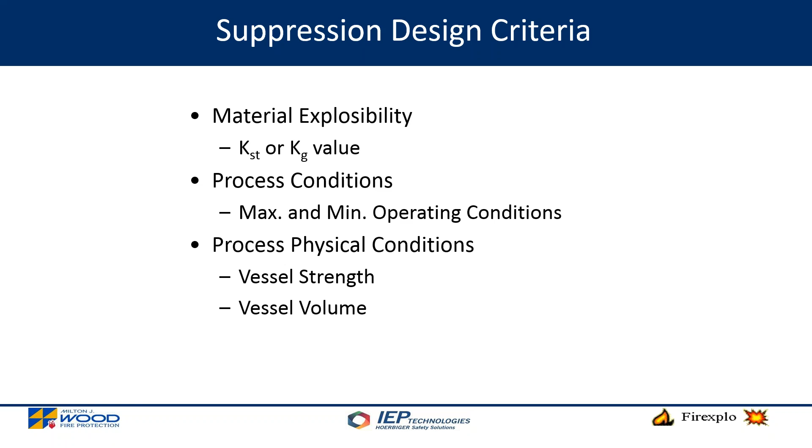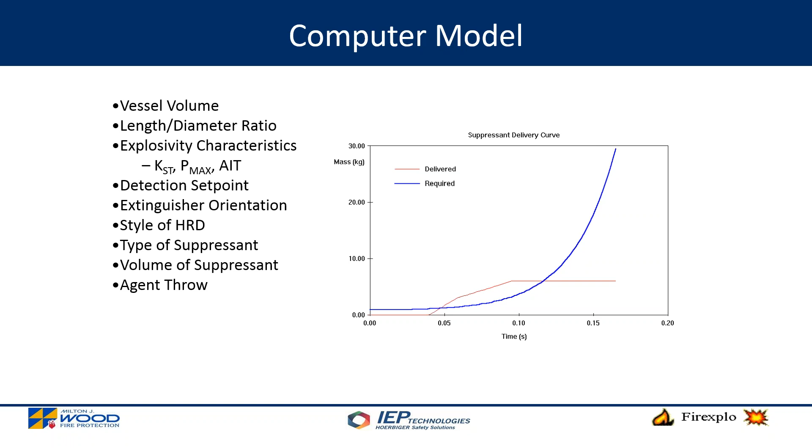Here are the different factors that go into our decision making on which protection technique makes the most sense. Most of the early questions are determining whether or not venting is a viable option. Venting is a very cost-effective passive solution for explosion protection, and most customers try to utilize that technique where appropriate, but sometimes that's not always viable because of the safe area required for venting. The next consideration is what the duct configurations are, and whether passive products can be utilized. The exhaust duct is a key ingredient.

Whether the air is being brought back into the building or exhausted outside will drive what decisions are being made on which isolation devices are utilized. You also have to take into consideration the operating pressure and temperature of the process to make sure you're selecting the right components.

Often in biomass applications, we come across a lot of inline fans. Inline fans are considered ignition devices, so the dirty air with the fuel and oxygen is being passed through the fan. NFPA requires that NFPA 69 isolation devices be utilized around the inline fan, whether that's incorporated into the protection system of another device. It depends on the layout of the plant.

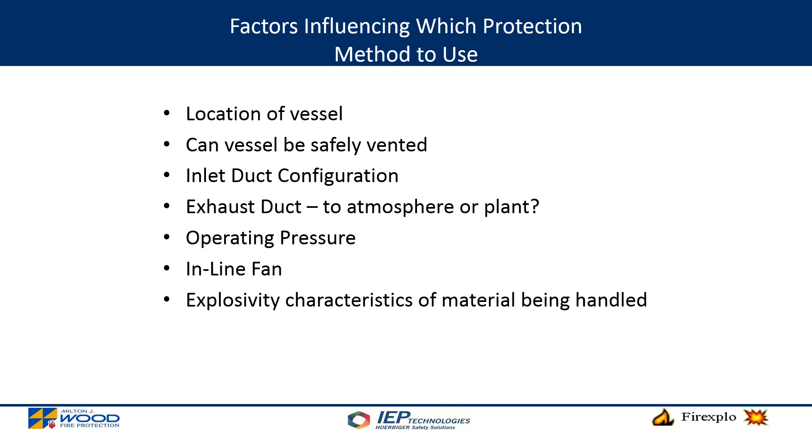Lastly, I'm going to talk about the different pieces of process equipment that we come across and what some of the considerations are. We protect more dust collectors than any other piece of process equipment, and it makes sense when you think about it. The finest particles, the driest particles, the most susceptible particles to ignition are in the baghouse and the air material separators.

So there are a fair amount of applications where we protect baghouses. Now, there are many different types of baghouses, whether they're hanging bag, cartridge types, lower tube sheets, or whether or not they're product receivers, meaning they're going to have a dense material flow on the infeed, as well as the possibility of house vacuum systems. All these different types of collectors have different requirements for locating equipment.

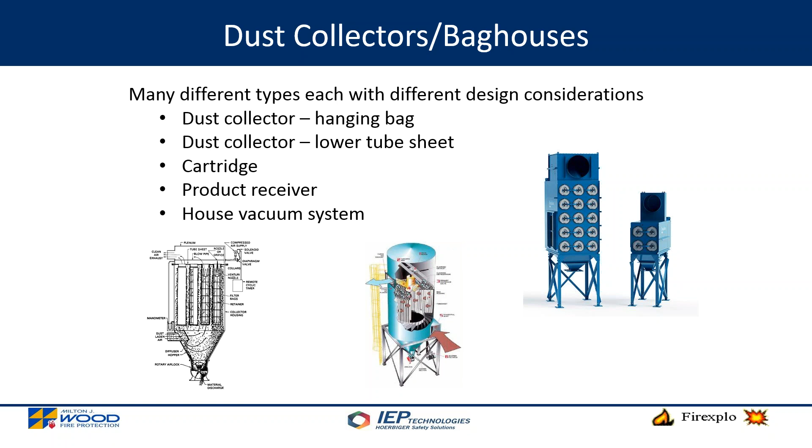Locate our detectors outside of the media range so we can get a clear detection path to the combustible dust cloud, and we also need to distribute our agent evenly throughout the entire hazard. So depending upon what type of dust collector or baghouse it is, that will drive the location of the different types of equipment.

The next type of air material separator we come across is cyclones. It's where material is fed into a cyclonic vortex. The heavy materials fall down and the fines move downstream.

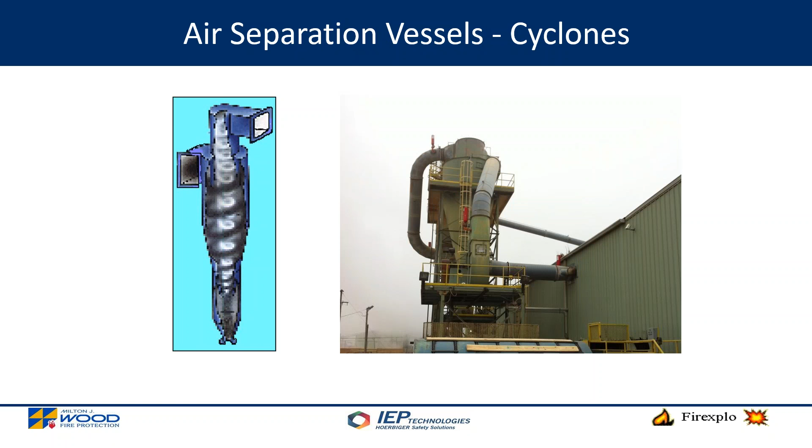With cyclones, there are some different considerations. Typically, you have some high velocities at the inlets for these ducts, and the cyclonic effects on the inlets will create a high wear pattern. So that needs to be avoided with your protection equipment, whether it be vents and/or suppression equipment. You want to provide flush-mounted equipment onto the cyclone to make sure you don't destroy the efficiency of the vessel itself.

And sometimes cyclones, especially in biomass applications, can be quite large, and it could have an array of 2, 4, 6 cyclones, which have common inlet headers and ducting. These can lead to extremely large ducts from an isolation standpoint.

Mills, pulverizers, size reduction equipment, very common in the biomass industry. Here's that same video clip, except we're going to see the ignition occurring inside the mill and detect it on the discharge.

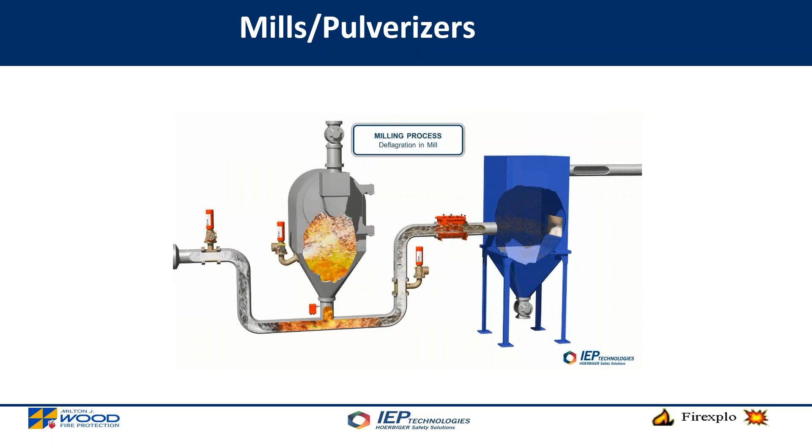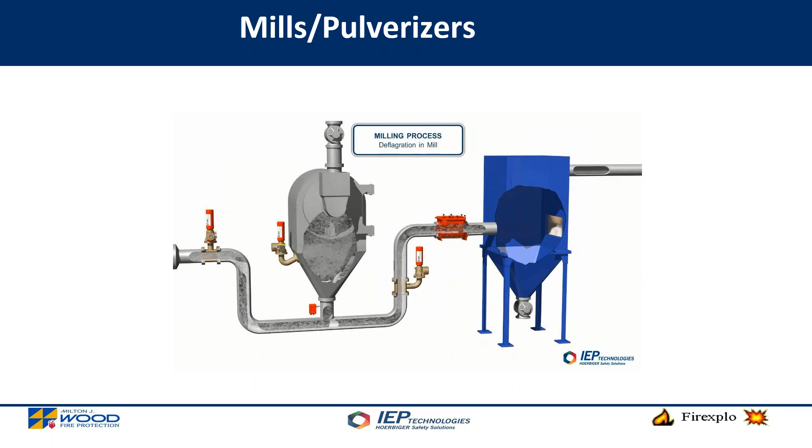So on the discharge of the mill, there's an optical detector, an IR detector, that senses the flame once it hits the discharge duct, and then the extinguishers associated with that zone of protection discharge to provide suppression and isolation. And again, the control panel is interlocked to stop the process equipment.

There are many types of mills. Typically, we see a lot of hammer mills, but there could be jet mills, pin mills, vertical mills. Mills typically are of high strength, however they tend to be the ignition source. They're the high energy point where either tramp metal or metal-to-metal type ignitions can occur.

Depending upon the type of mill, it might be a direct discharge or it might have a large hopper, and these all come into play on what types of detection, suppression and isolation are utilized. There's also consideration on how air intake is brought into the mill itself. Air intakes are critical for material moving and cooling, so you need to take that into consideration to make sure there isn't a potential for a flash inside the operating room where people may be present.

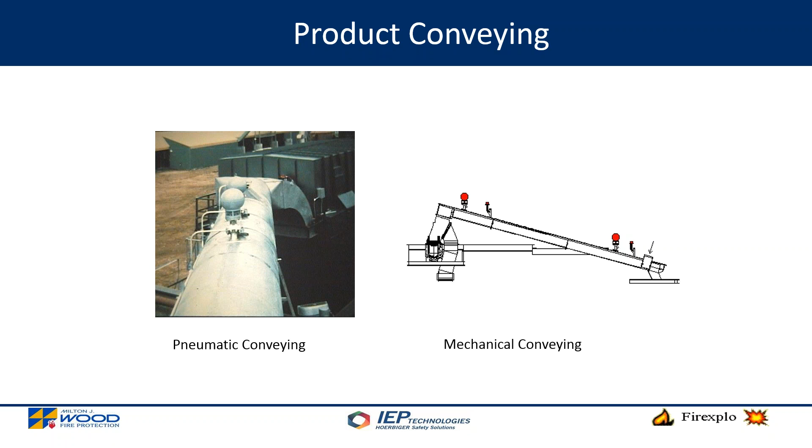Product conveying, we talked about these. These are typically considered isolation systems, especially with pneumatic conveying. The detection would occur at the vessel's endpoints, and then isolation would occur along the duct itself. In the case of mechanical conveying, if there are transfer points where there may be gearboxes and bearings, they may require additional detection and isolation points.

Bucket elevators are a method of conveying vertically, where the material is picked up at the bottom of the bucket elevator and transported to a higher elevation and then dropped off into storage, typically a storage silo. There's a lot of ignition potential associated with a bucket elevator, as Bob talked about. The head and the boot are the prevalent locations for ignition of the deflagration, so you need to isolate and keep the flame from propagating through the different casings, the infeeds, and dust extraction lines.

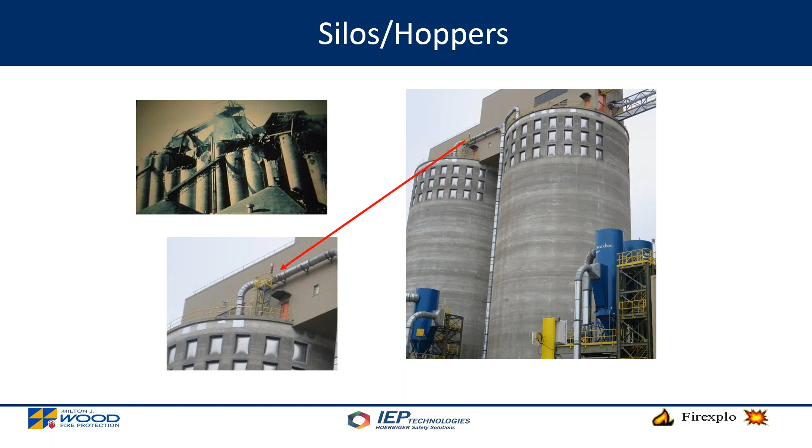The considerations with a silo are that the protection needs to take into account any sort of fill level that may occur inside the silo. So understanding where the high level and low level indicating switches are located is very important. Also how the material is fed into the silo, whether it's a single direct infeed line or part of a large conveyor with multiple infeeds to different silos.

Lastly, consider how the silo breathes itself. Material is being moved and displaced inside a vessel, so the air inside needs to be displaced. Is that done through a bin filter, dust extraction lines? Those are vessels or interconnected ductings that would require some sort of protection.

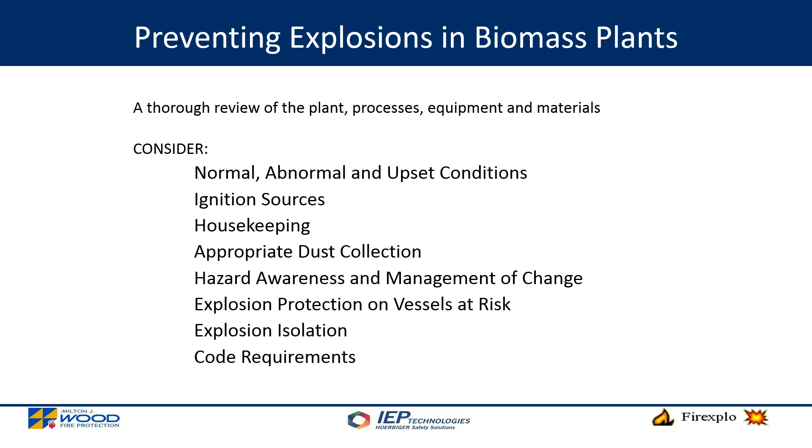So that's the presentation on the different types of explosion hazards, the process equipment, and the protection techniques that can be offered. And here's a last consideration list of the different factors that go into the overall protection of a given hazard.

Any questions at this point? Burke, thank you, I'll take over from here. We do have some questions queued up, and I'm excited because we got some good stuff.

I'll start with a basic one for the group. This is from James Gaffney, who asked: how common are dust explosions at biomass facilities? To sharpen that question up, do we have any indication in terms of number of incidents per operating hours? Any bearing you can give us on that question would be appreciated, from anyone in the group who wants to take it.

This is Burke Desatel. I guess that's a challenging question to answer, because with any explosion hazard you have an application with combustible dust and oxygen in the right concentration, and you're waiting for that ignition source. To statistically pinpoint the likelihood of an ignition occurring is not an exact science by any means. However, we do have hundreds of biomass applications, and we know of successful suppressions that we hear about every year. I've also investigated, as well as Bob Zalosh, other explosions that have happened that we've been called in to investigate and provide protection for. So it's not something I think we can qualify or quantify, but we can certainly say that it does occur. Bob, would you like to add to that?